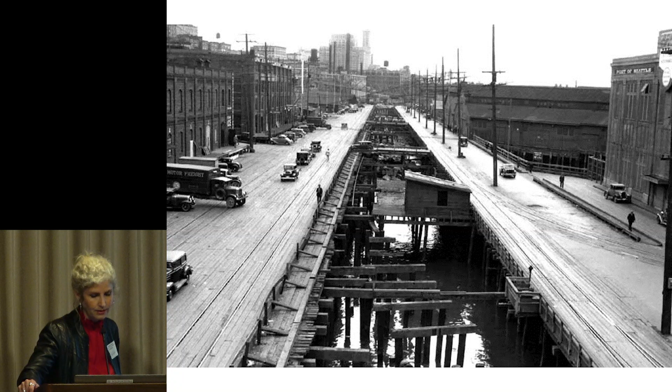At some point in the 1940s, when vehicles became much more popular, a freeway was built on the waterfront, which we affectionately called the Alaskan Way Viaduct. This is a photo of that viaduct under construction in 1952. It was completed in 1955.

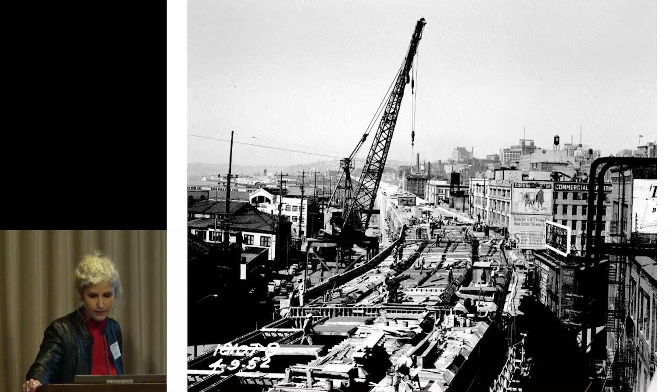Thought I'd talk a little bit about the history of how this project got started in the first place. You might remember in 2001 we had a pretty significant earthquake here in Seattle, the Nisqually earthquake, and that earthquake damaged quite a bit of our waterfront infrastructure, including the Alaskan Way Viaduct, which was already in need of replacement. It also damaged the Elliott Bay Seawall, which is basically the wall that extends the entire length of our waterfront and forms the foundation for the waterfront.

The seawall was already vulnerable. We had quite a bit of damage to it even pre-earthquake. So the earthquake really brought out these additional problems we had along the waterfront, and it was the impetus for starting to relook at our plan for the waterfront. The state, the city, the Port of Seattle, and King County all got together at some point to talk about what is the solution for our new waterfront.

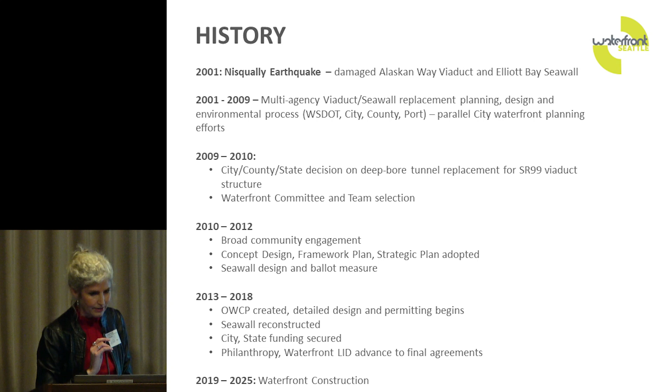That was the impetus for the city to start working with the community, hiring a design team to come in and really help us develop a vision for our future waterfront. I've been working on this program since 2012. I was brought on once a vision was created. I'm a civil engineer, went to UW here locally, and I was brought on to actually execute on all of the talking, the vision, and the planning of this project.

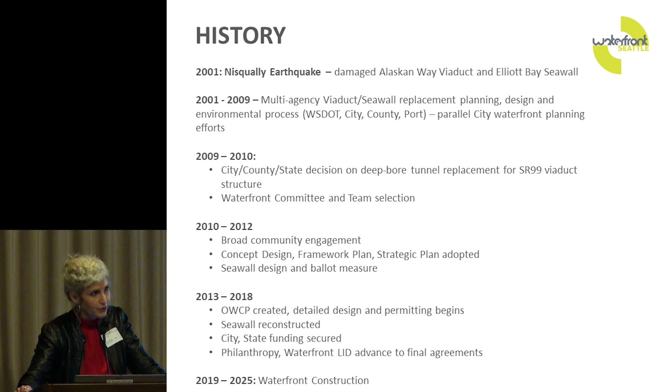So we've been doing that since 2012, and now we're in the middle of construction. We're two short years away from being complete, and we're all really excited about it.

This is a graphic sharing with you all the different projects happening up and down the waterfront. This orange dashed line marks the alignment of the SR 99 tunnel, which was completed in February 2019. This green line that runs along the waterfront represents the Elliott Bay Seawall, which forms the foundation of our new waterfront. We started rebuilding that in 2013 and were complete in 2017.

You might recognize there's a large project happening with Colman Dock, a ferry terminal that's been reconstructed over the last six years, and we've been working really closely with folks at Washington State Ferries on that effort. Everything shown here in gold color is part of what we call the Waterfront Seattle program, so basically all of that is being reconstructed as part of this program.

A couple of other projects to note here in purple. The Seattle Aquarium has an expansion they're building as part of our waterfront, and I'm going to show you some renderings of what that looks like. Pike Place Market has built what's called the new MarketFront—they've built a new building and a deck overlooking the new waterfront, and we're going to be attaching to that with another pedestrian bridge, which I'll show you in just a minute.

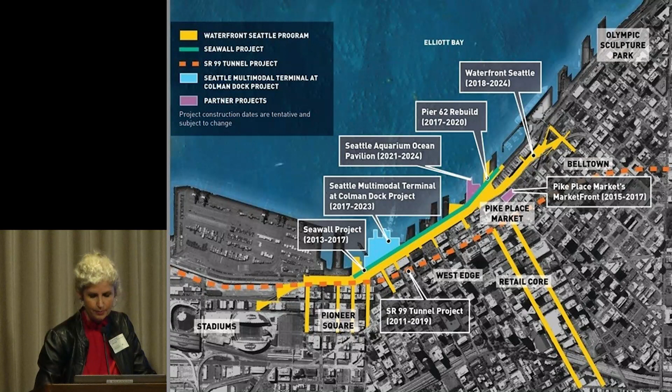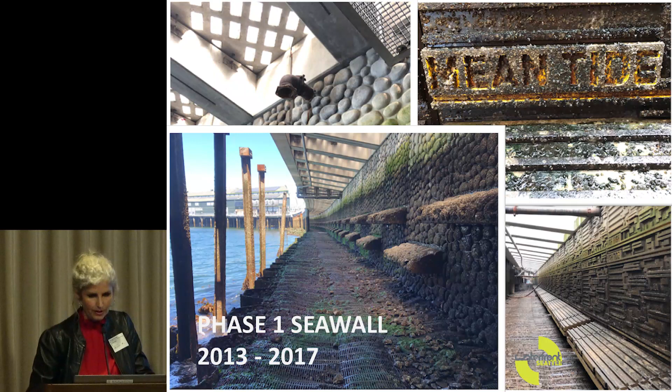A couple of images—this is one of the new seawall. We spent a lot of time thinking about what this new seawall would do outside of its structural capacity and forming the foundation for the waterfront. We also had an obligation to consider habitat enhancements as part of this, and that's part of what you're seeing here. I've got a few more slides; I want to talk about that in a minute.

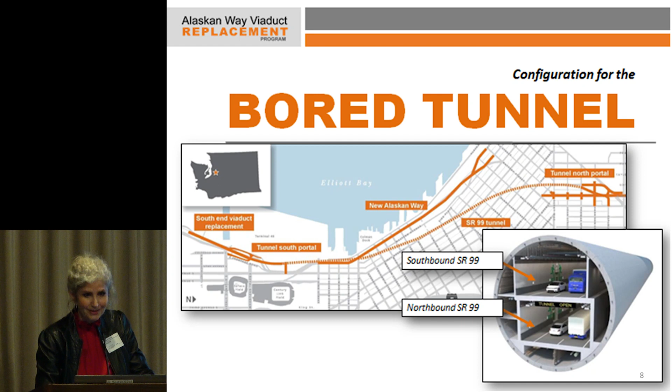The Bored Tunnel project was completed in February 2019. Some of us in this room, including myself, may have been lucky enough to walk through it before they opened it to traffic. It was just heaven to see that be done because it allowed for the viaduct to start being demolished.

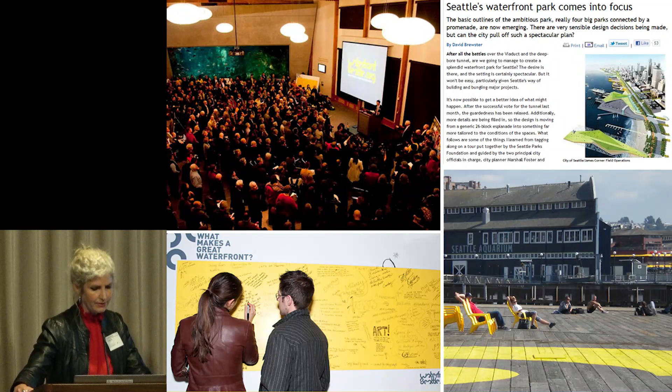We spent many years, between 2009 and even through today, just working with the public, letting people know what we were doing, trying to get ideas from people about what they wanted to see on our new waterfront, so that we could incorporate those ideas and thoughts into the ultimate vision for the waterfront.

We spent a lot of time, and continue to do so, with our tribal partners. We walked them through what the vision was for the project. They told us what was important to them in terms of their own priorities, protecting the marine environment, salmon habitat, and making sure we're adequately reflecting their tribal history in terms of adding art and other elements along the waterfront. So we've been very conscientious about including all of these elements on the new waterfront.

The project itself extends from the stadiums down at the south end, on the left-hand side of the screen, and basically spans all the way along the waterfront up to Belltown at Bell Street. So 26 city blocks in all. The spine of the project really runs along Alaskan Way.

The most important thing to think about when considering the reconstruction of our waterfront is that when we took the viaduct down, we were able to take Alaskan Way, which used to be on the water's edge, and push it as far east as we possibly could. I have some visuals that show you that.

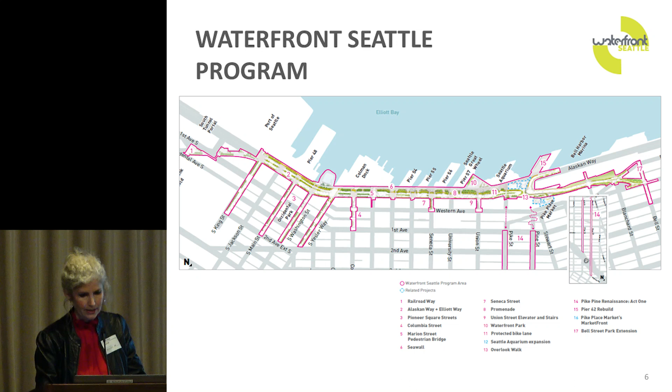Overall schedule, just very high level: we really started construction when we built the new seawall between 2013 and 2017. We also built Pier 62 sometime between 2017 and 2020. I'm going to show you some images of that.

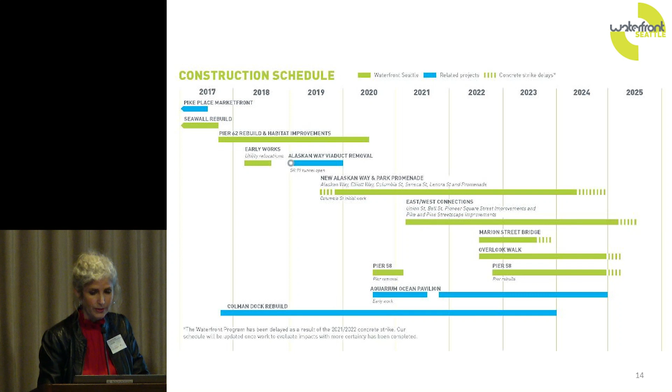But we really couldn't start in earnest until the viaduct came down. So the tunnel had to be complete, the viaduct had to come down, and most of that happened in the fall of 2019, which is when we were able to really start building the new road, putting in new utilities, and building the new park. What this is showing you is that we're going to be done with most of this work in 2025, hopefully early in '25.

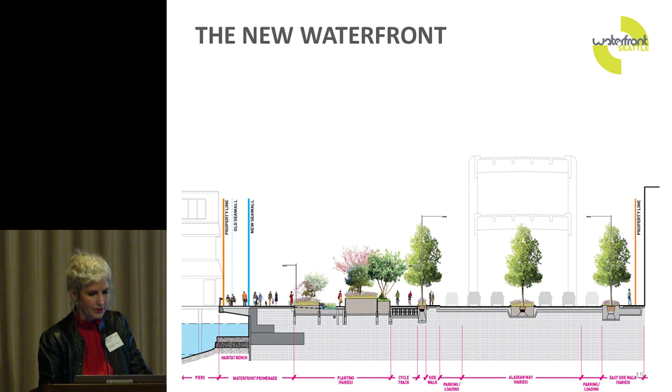A little bit closer view of the Seawall itself. One of the things that we did in terms of enhancing habitat is really focused on salmon restoration, building this salmon migration corridor underneath the seawall.

So what you see from the surface is basically a structure that extends over the water, and there's a glass floor. There are these little glass panels in these concrete panels that run up and down the waterfront. What those do is let light through down below, where we've built habitat benches and shallow respite areas that support salmon migration up and down our waterfront.

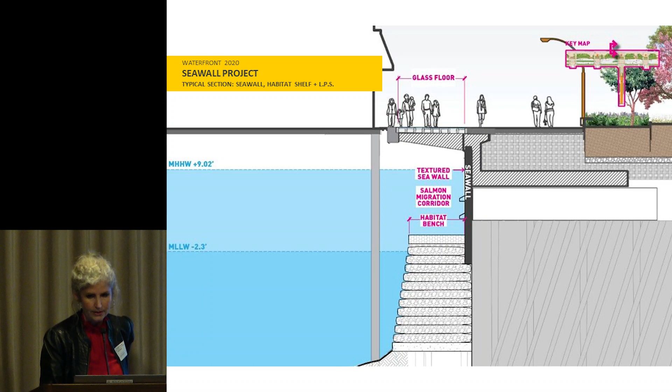The University of Washington has been helping us monitor the status of these new habitat features, and they're working. There are people from all over the world coming to our city investigating the process we've gone through to improve the habitat along our waterfront.

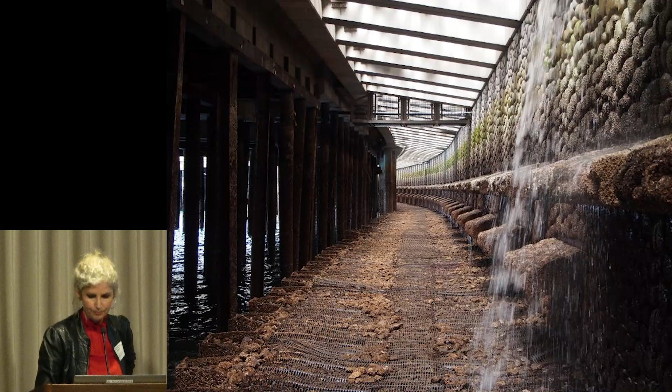This is a picture just showing you that light that comes through the top, through these glass panels down to the seawall.

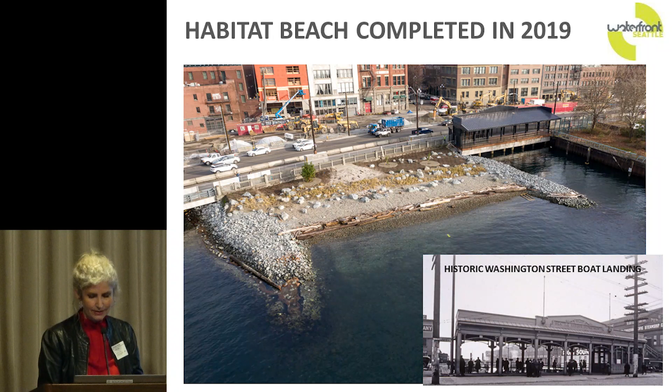We also built a habitat beach. This beach is located just south of Colman Dock, and we were able to open this beach on July 1st this year, so pretty excited about that. There's a historic boat landing called the Washington Street Boat Landing. We've totally refurbished it, and it looks amazing. We're going to be opening it next spring with a concessionaire inside the space to help program and activate it, so we're very excited about that as well.

I'm not going to spend much time on this, just want to point out that between 2019 and 2021 we've hit a lot of milestones and made a lot of progress. We just finished the Habitat Beach.

We opened Columbia Street to two-way traffic. We completed a pier at Pier 62. And then we really struggled through COVID, because we actually started construction in earnest in the fall of 2019.

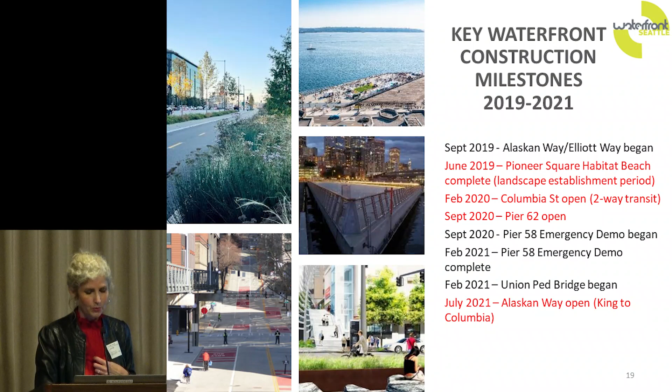Once we hit one of our major first milestones, building a transit connection on Columbia Street, we opened it in February, and literally the next day we were told to shut down. So we had some decisions to make. One thing I'm really grateful for in terms of Mayor Durkan and her leadership is we were able to convince her that we really wanted to keep going.

So we put all the security protocols in place, narrowed our team down to the minimal amount of people we needed, and kept going. That couldn't have been a better decision. I'm just really glad that we did that.

This is a visual of some ongoing Alaskan Way construction. You can see here that we've built the new road within the footprint of the old viaduct, and now we're really focused on rebuilding this entire section of Linear Park. A lot of people, if you go down there, can actually see the curb to curb width, and this new park is actually almost wider than the new road, which I think we're all pretty excited about.

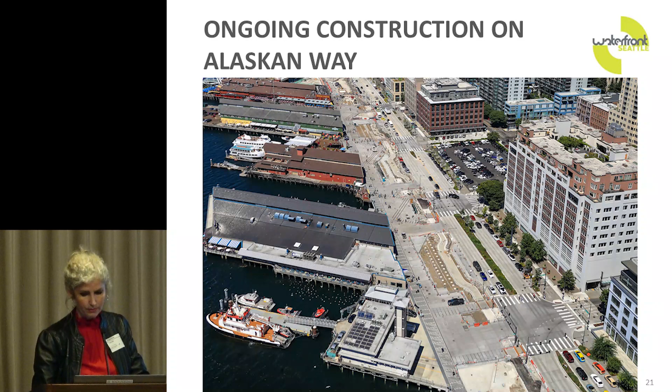One of the controversial aspects of designing our new waterfront was a criticism about the street itself, and I just wanted to address that quickly. We have two lanes each direction on Alaskan Way for the majority of the length of the waterfront.

The exception to that is here at the south end, where we've got Colman Dock, the busiest and largest ferry terminal in the United States. Working with Washington State Ferries, they require some queuing on the street to get people to and from the ferries, so we had to provide for that.

Alaskan Way also serves as a major transit route for buses running into and out of downtown to Southwest King County. I live in West Seattle, and I take the bus every day, so I'm on these buses every day. King County Metro argued very strongly that they needed dedicated transit lanes in order to keep the headways and keep people moving quickly, so we added transit lanes at that south end.

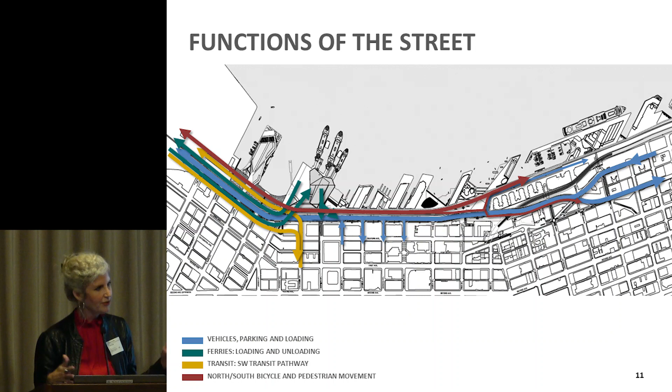So the southern four blocks are pretty wide. We tried to supplement that with wider sidewalks, nice wide medians, and lots of plants. But north of this location, everything is pretty narrow—it feels pretty narrow on the street. This is a picture of the Habitat Beach we took just last year, and it shows the configuration of the south end of the roadway.

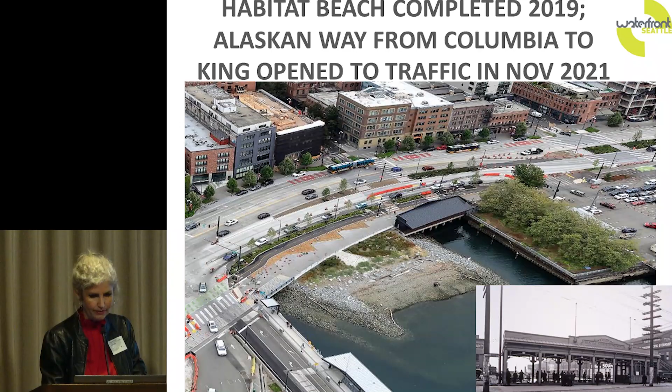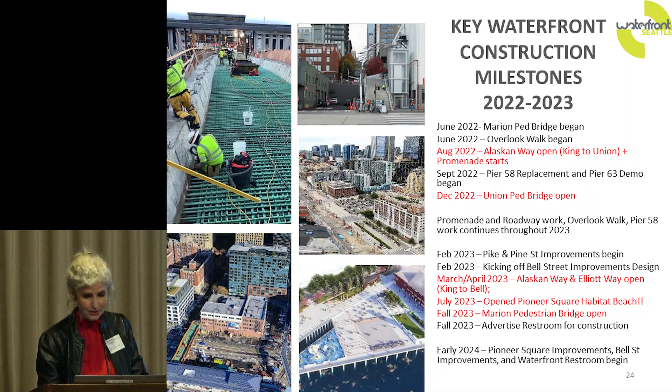We've made a lot of progress in the last couple of years alone. Through COVID, we made a lot of progress, and in the last two years, we've made even more. There are lots of big milestones, and I'm not going to walk you through the whole list, but I have some visuals that I can share that do that.

This is a visual of the promenade at Colman Dock. That location is a major transit hub, so we've got all the folks coming into the ferry system, the water taxis from Vashon, Kitsap, and West Seattle, and all the buses that King County Metro runs serving Southwest King County, all congregating in one location. So with our design, we tried to accommodate and think big about a transit hub and the needs of a transit hub at that location.

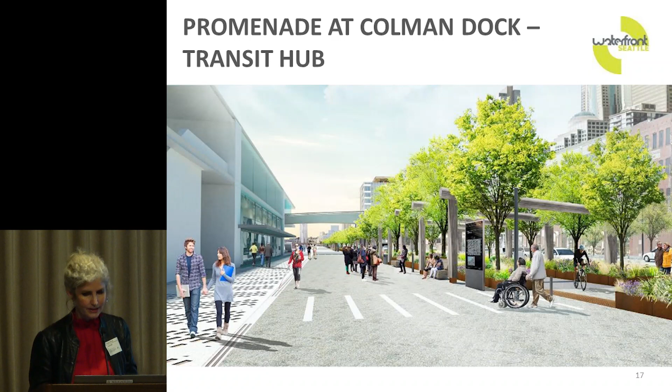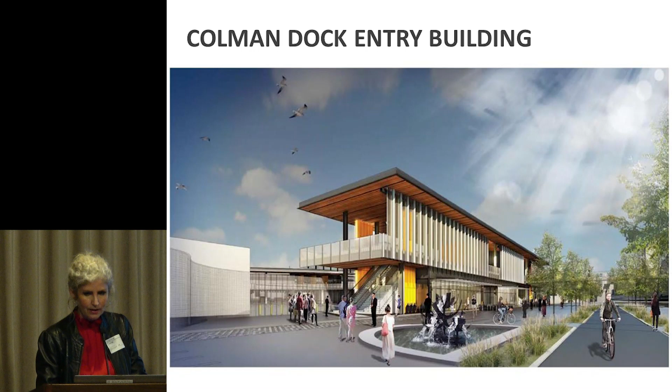This is a rendering of the new Colman Dock entry building, and I think they opened this just a few weeks ago. We've been working closely with them because we are building a new pedestrian bridge, called the Marion Street pedestrian bridge, that connects pedestrians from First Avenue over to the new terminal. We're just about getting ready to open this bridge - it should open in less than a month. Very excited about that.

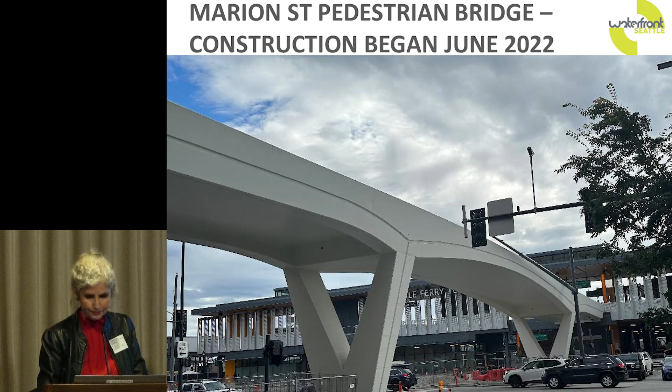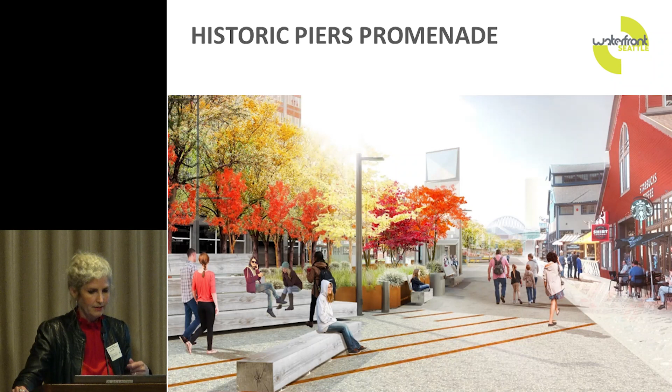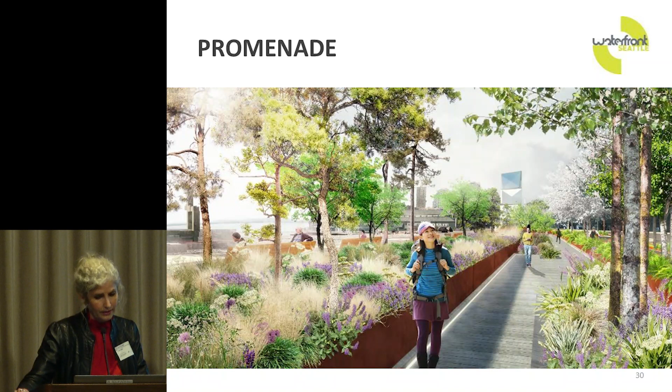And this is our rendering and vision for what the new park promenade will look like once we're all done at that specific location. We have tons of gardens, landscaping, and seating elements. We have wayfinding, we have art - we're really excited to get all this installed. We also have a boardwalk lit up at night with landscaping all around it. It's going to be stunning.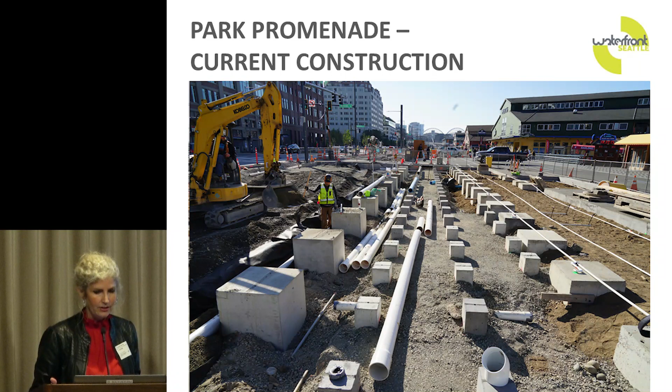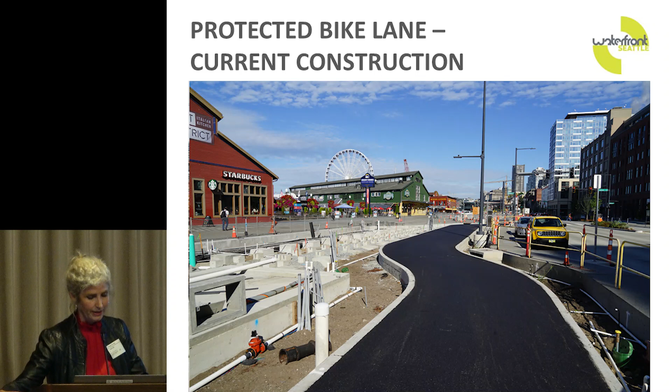Just a couple of construction photos. We're forming up some of the promenade areas and the concrete specifically. We've been installing all the irrigation lines, all the utilities needed for the future landscaping, and the structural foundations needed for the boardwalk. We're also installing a protected bike facility that spans the entire length of the waterfront. So you're starting to see these things take shape.

Up at the north end of the waterfront - this is kind of hard to read, but I wanted to provide a little overview. This is Pier 58, located between the Great Wheel and the aquarium. And north of it is Pier 62. I've got some images of both of those coming up.

One of the crown jewels of the new waterfront, and one of my favorite parts, is called the Overlook Walk. It's essentially a massive pedestrian bridge connection that connects Pike Place Market up and over the new roadway that runs underneath it - that's Alaskan Way. The bridge spans over the road and connects to a rooftop deck, which will also be a park, sitting on top of the new aquarium building. That'll be connected to a grand set of stairs with an elevator as well. I've got some images I want to share on that.

The road itself runs northbound up the hill along Elliott Way. We built a new bridge up and over the Burlington Northern Santa Fe Railroad tunnel that runs right underneath this area, and then we're reconnecting to the existing Alaskan Way with this curved road here.

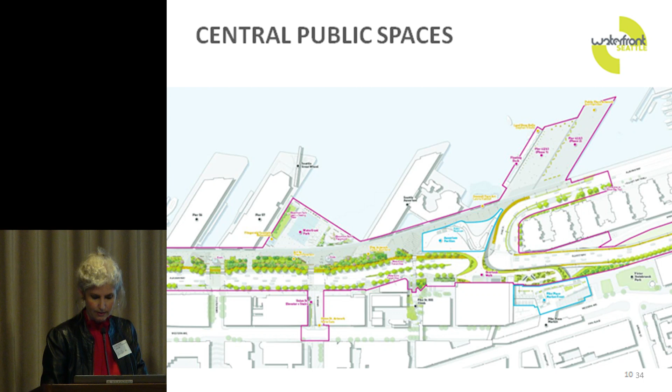Pier 62, so we rebuilt this pier starting in 2017, and it opened in September 2020. Not the best time to open a public park, didn't get a whole lot of people out here, but it's a beautiful new pier. It's intended to be a flexible space that can be programmed in many different ways.

We included a floating dock at the southern edge of this pier. One of the things we heard a lot during the visioning for the new waterfront was people wanted a place to go and touch the water. If you think about what the waterfront looked like previously, there really wasn't a place you could get out to the water and touch it. So this was one of those elements we all felt strongly about including, a place for people to get down and really connect with the water.

The other location for that is the new beach we built at the south end of Colman Dock. Since we've opened it, we've seen a lot of programmed events, very successful.

One of the things I wanted to focus on here is that we have a nonprofit group called Friends of Waterfront Seattle, an incredible group of civic partners and civic leaders in this city who have been with us since 2009, supporting this project, urging it on, and raising money to help pay for it. Friends is raising $110 million in philanthropic gifts to the city to pay for the capital cost of this program. That's an unprecedented amount of private money being pumped into a public program like this. They're also raising another $90 million to pay for maintenance, programming, and security needs for the park after we're done.

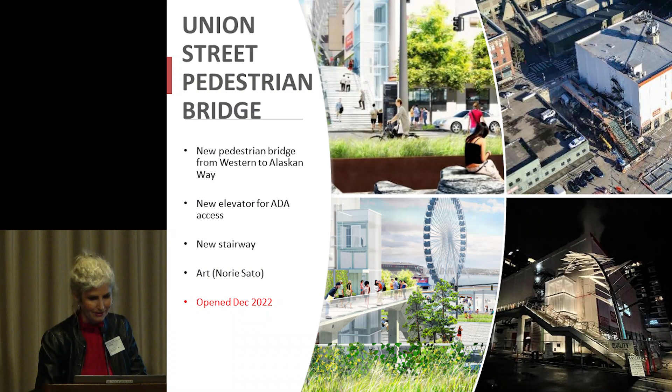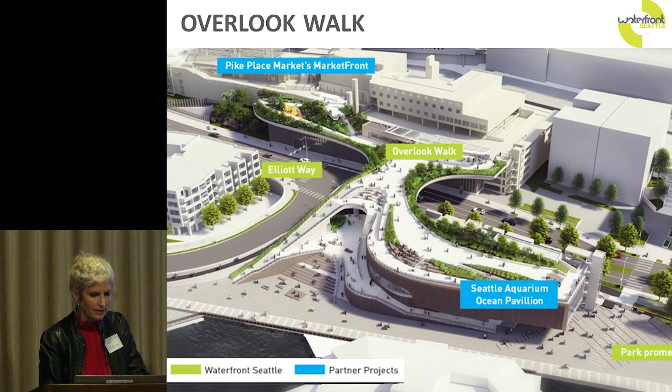This is the new Aquarium Ocean Pavilion project. It's an expansion of their existing facilities, so they'll have their existing facility that is over water and this additional ocean pavilion piece. There's an elevator that runs along the south side of this aquarium, and then there's this grand set of stairs that takes you down and connects you to the new park.

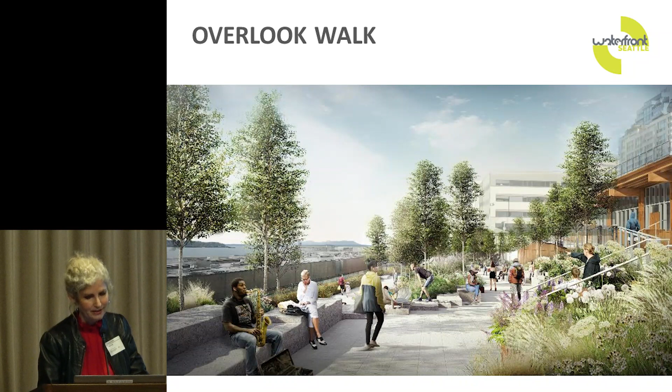The Overlook Walk itself will have plenty of landscaping, places to sit, to just enjoy the views from this incredible spot. One of the comments we heard from people is that we're going to miss the views from the top level of the viaduct, and so this is an ode to that. We're creating this elevated park space that captures those views of Elliott Bay and the Olympics.

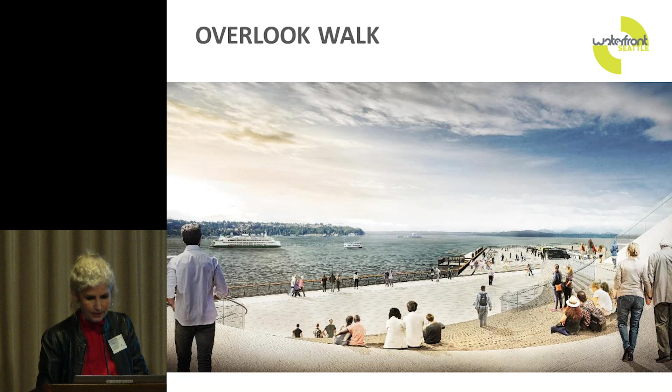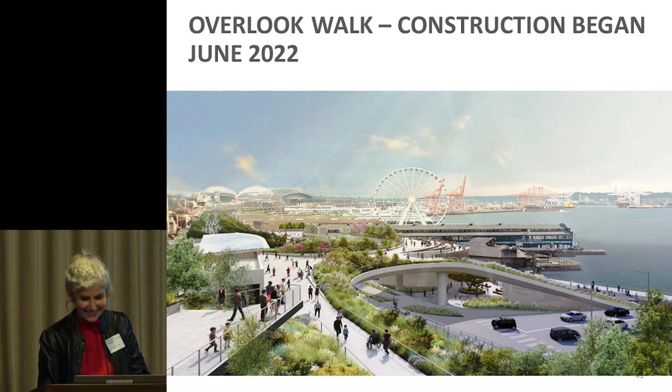This is a view of the Overlook Walk, just looking south toward the stadiums. You can see those in the distance. Mount Rainier is kind of missing, but it's going to be gorgeous. And then this is the aquarium expansion, just looking up at it.

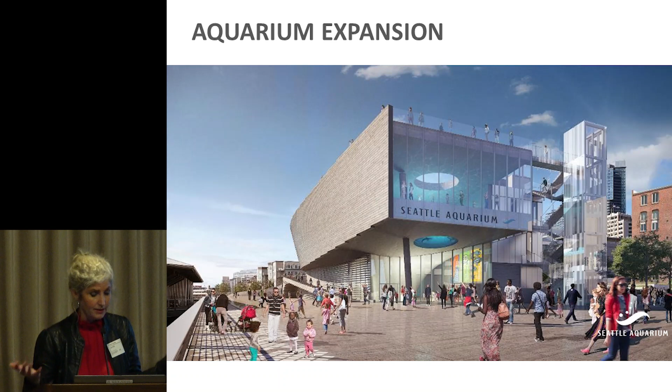They have this, what they call an oculus that they've included, and it is a circular window essentially. So you can actually be outside of the aquarium and stand under this glass window and look up and see the sharks or whatever it is they're going to put in their tanks. I thought that was a pretty cool feature. But everything they're building here provides for this public rooftop space that is essentially a park. It's not private.

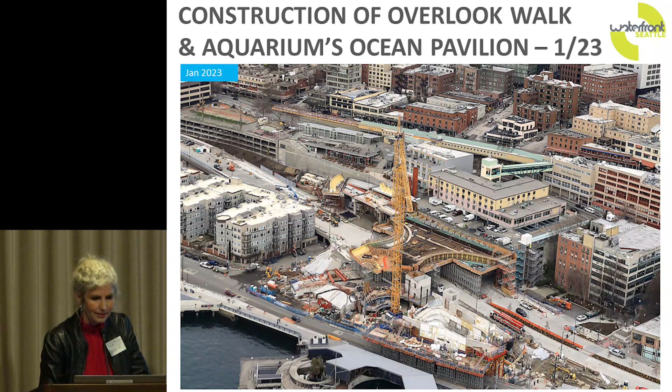This was a photo taken in January of just this last year. You can kind of see this is the market, the new market front, and you can see the new bridge taking shape here, and the new road that runs underneath it.

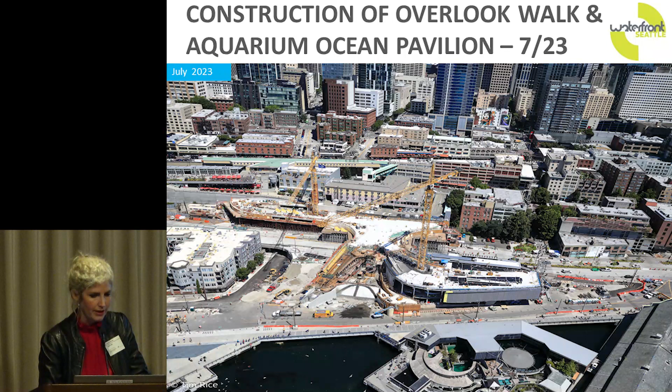This was taken in March, and this was taken in July. If you went down there tomorrow, you'd see glazing, windows, and all sorts of finishes going up on the aquarium building itself. Their crane was just removed about a month ago, and we're going to be removing our crane shortly. We're making a ton of progress together on this.

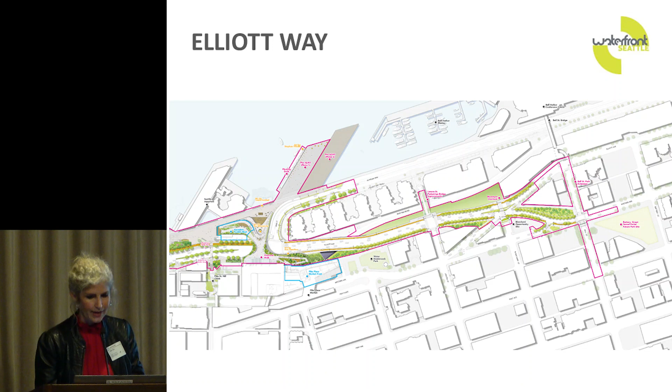It's pretty nifty. We also made some improvements to the Lenora Street pedestrian bridge and elevator, which is owned by the port. We've been working with them on enhancing that bridge structure and making it accessible. We also have 2 blocks of improvements in Belltown, and we're just now kicking off the design phase for that, working with the Belltown Community Council and others in that community. They're very excited about that.

This is an image showing that Lenora Street pedestrian bridge with an elevator at the end of it. And this is that new bridge structure along Elliott Way. We've included sidewalks and bike lanes and 2 lanes each direction for vehicular traffic.

The new Pier 58, we just began construction of this project last fall. It's been a year. This is an exciting new pier being built level with the new park promenade along the water here. It includes a beautiful new children's playground. This was another one of those items where, when we went out to the public and had a conversation about what people wanted to see on the waterfront, they all said they wanted a children's playground. We don't have many children's playgrounds in Seattle, especially on the waterfront or near it.

We also have a grassy area for people to enjoy the views, and we have a tree grove. We have the Fitzgerald Fountain, which not too long ago fell into the water when the old pier collapsed, which was obviously in dire need of replacement. But we brought that fountain back to life, and we're going to be installing it on this new pier as well. We're also building a new public restroom on the waterfront — we don't have one, have never had one, and a lot of people are excited about that.

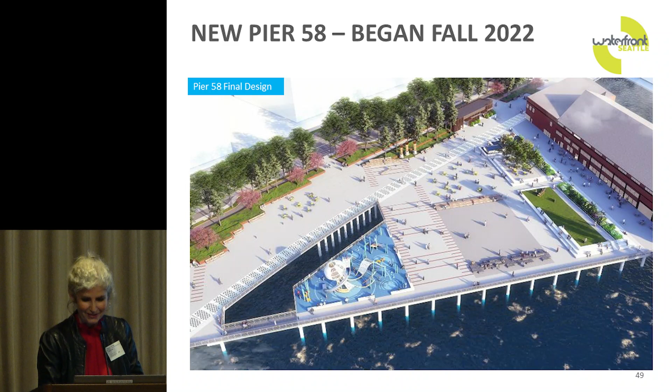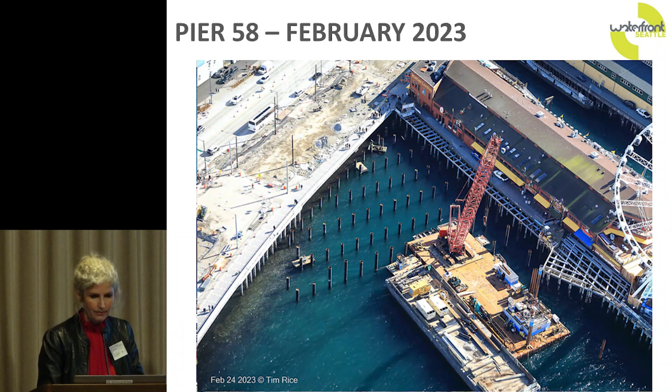Just some construction images. These were some of the piles that we drove between September and February, reflecting about half of what the pier size will be ultimately. We're just about to start driving some new piles, supposed to start today. We're going to try to get the rest of the piles in this season and hope to get this pier wrapped up sometime in early '25.

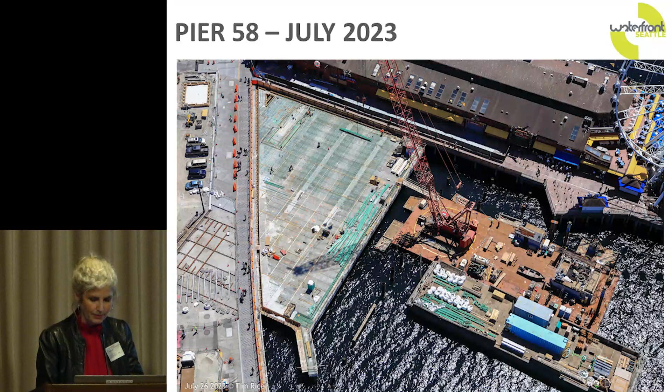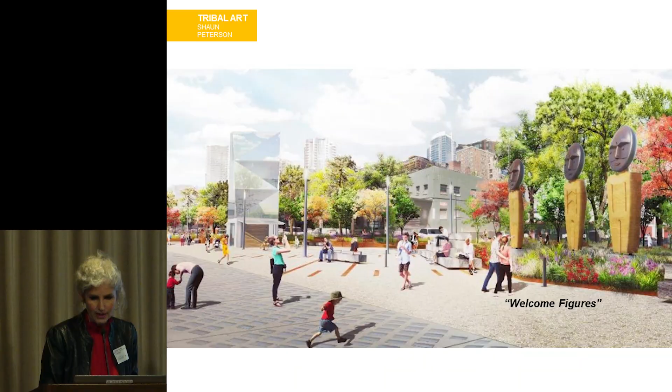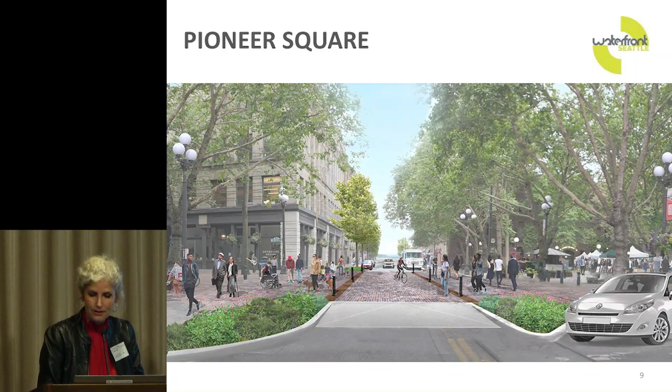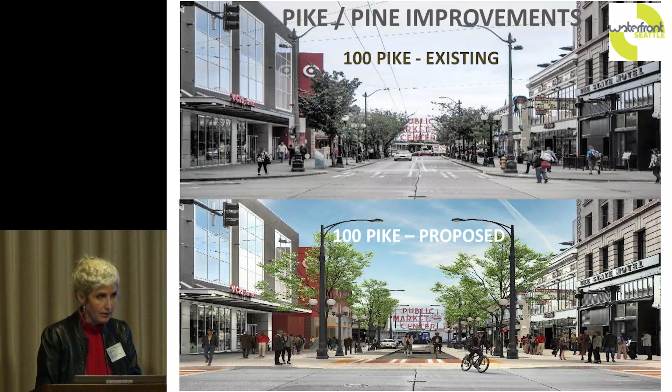So how much are we spending on all of this? The Waterfront Seattle program total cost is $781 million, and we have essentially 4 funding sources. We have no federal funding included in this project. We have a lot of city funding and a lot of state funding - the state was obligated to pay to replace the roadway as part of their replacement of SR 99 and the viaduct. But essentially, we have the state, the city, and then 2 creative sources.

One I talked about already is the philanthropic funds - $110 million coming from Friends of Waterfront Seattle, who are relying upon donations from generous people.

And then the LID, which is a local improvement district - this is essentially like a property tax. It looks at all of the properties in downtown Seattle, and there's an assessment on how much those property values are intended to go up once we're complete with the waterfront improvements. The LID takes a tiny portion of that assessment and applies it toward the capital cost. It wasn't a very popular idea, but it did get passed by City Council, and it helped us raise $160 million of much-needed funding to pay for this project.